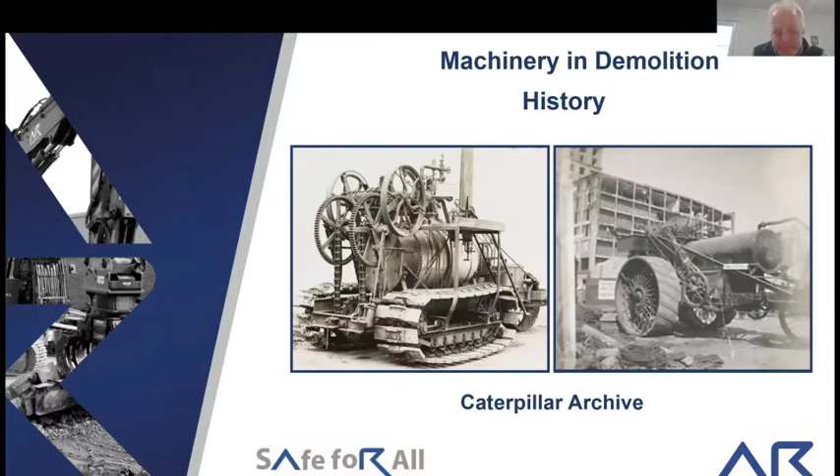But I have a passion for steam, which, as I explained earlier, I'm not sure whether it's a good thing being seen as the modern day Fred Dibnah or a bad thing, because Fred Dibnah's practices in demolition were very entertaining, but I couldn't say that they were the best practices.

But steam engines were used a lot in demolition, and really interestingly, I actually used a steam engine in a project of ours in March 2020, last year, a very high profile project in a quarry for Aggregate Industries. We got some sections of old conveyor framework to tow up a ramp, and it seemed to be the best kit for the job, and it worked incredibly well. It was interesting when I mentioned to the client I wanted to bring a 100-year-old steam engine with a winch on it into a quarry, but it worked well, and they were delighted. And I do have a bit of, if it's not broke, don't fix it, and if a bit of kit will do the job, then use it.

I have to pick up on the wrecking ball, because the two most popular questions ever asked to me are, do I blow things up and do I use a wrecking ball? I've done 3 explosives jobs in my entire career, and I've never seen a wrecking ball work in my entire life, which I would love to see, and they're still used widely in America particularly. So the wrecking ball is well and truly ingrained in our history books, but you won't see one used in the UK now.

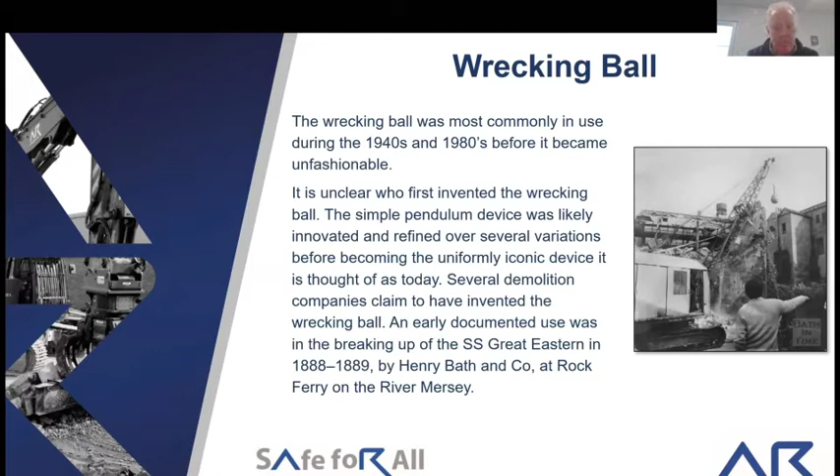So about our techniques and how we consider our techniques and what we do, there's various types of demolition. So there's the word demolition, where we demolish a structure. We get more involved in deconstruction, so reverse construction, take it apart. Quite often we're asked to take a structure down but with as little impact or disruption to the surrounding community as possible. So almost like a magic trick, we want you to get rid of that structure, but we don't want any interference to anybody while you do it.

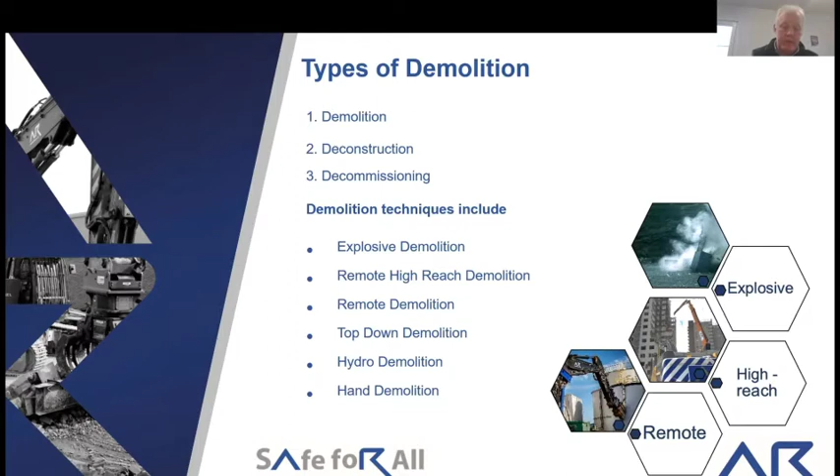So this might be a multi-story tower block where we'll wrap it in scaffold, and we will literally just take off one floor at a time, gradually reducing the structure from within the scaffold and bringing the scaffold down with the structure. And from the outside, you just wouldn't see it happening. All you'd see is a gradually reducing scaffold. Hydro demolition, where we use high pressure water to sometimes remove concrete, and still you'd be surprised at how much hand demolition work happens, where we really do carefully take things apart.

So the key considerations we have is we try to liaise with as many stakeholders right from the beginning. So anybody that's involved in the project, whether it's the client, the surrounding public, anybody that might be involved is critical to engaging with those as early as possible. We have somebody to coordinate all of that planning, and then we have to look at things as simple as a footpath closure or a road closure. We can need 3 or 4 months sometimes to apply for a footpath or a road before we actually get that closure.

And then a big one is services. So if you were demolishing a structure and there's a large gas main, a large electric main, we have to think about, do we need to divert it? Do we need to protect it? Or as simple as before we demolish a structure, we have to disconnect the services, which can be challenging itself.

And then asbestos is one of the big things that we have to survey for. So by law, before you start any work on any structure, whether it's refurbishment or demolition, you have to have an asbestos survey done, even if it was built after we stopped using asbestos, because there's still a likelihood that something may have got in there. Perhaps something was stored in a builder's yard, and the builder thought, oh, we'll just put that panel in there. So we still have to have what we call an R&D survey done, so a refurbishment and demolition survey.

Asbestos is a funny one, because a lot of people run scared of asbestos, but if it's controlled correctly, it's not expensive to deal with, and it's not expensive to dispose of. And particularly in the agricultural world, we do lots of asbestos cement sheds, which is the lowest risk asbestos of the lot, really, and the training is fairly simple to deal with that. And then the disposal is fairly straightforward as well.

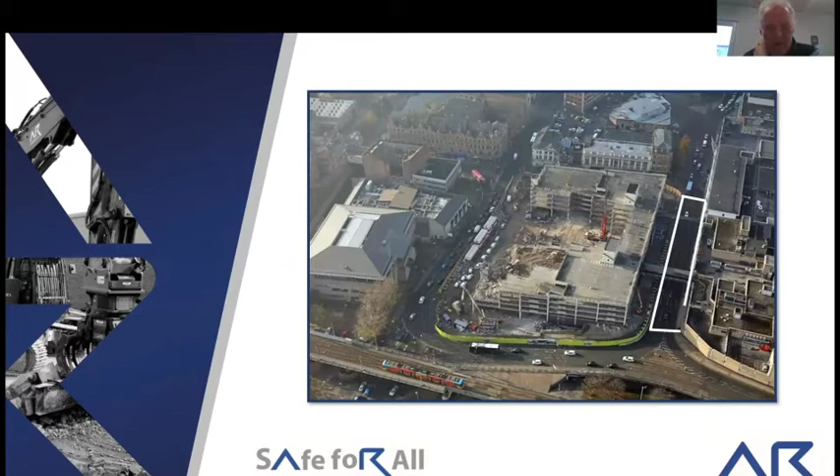So the project I'm going to talk to you about is a very challenging project that we did in Nottingham. It was a multi-storey car park with underneath it a bus station, and there were many challenges thrown at us with this project. So this is an aerial shot that was taken during the demolition, and to just point out most of the constraints. So we've got a lot of cafes and restaurants around us.

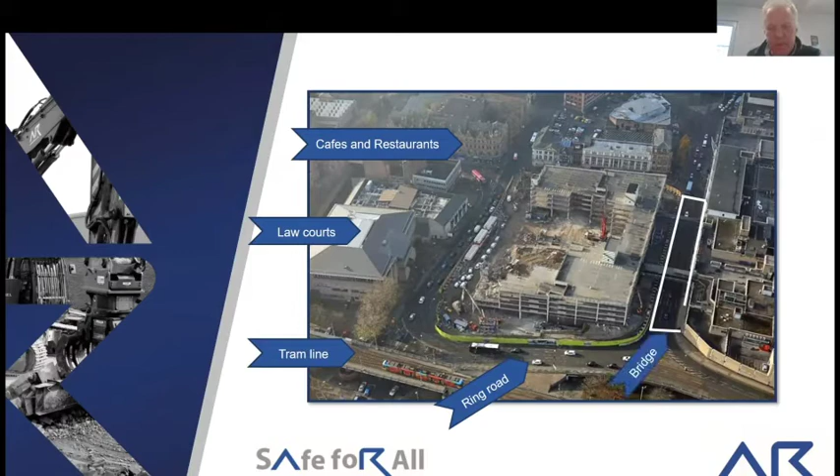Exactly opposite was the Crown Court. To the west elevation was the Nottingham tram line. Between the tram line and us was the Nottingham Inner Ring Road. The area outlined in white is a 5-lane piece of road between the car park and the Broadmarsh Shopping Centre. And that piece of road was actually a bridge. So underneath it was shops, which were all kept open during the project.

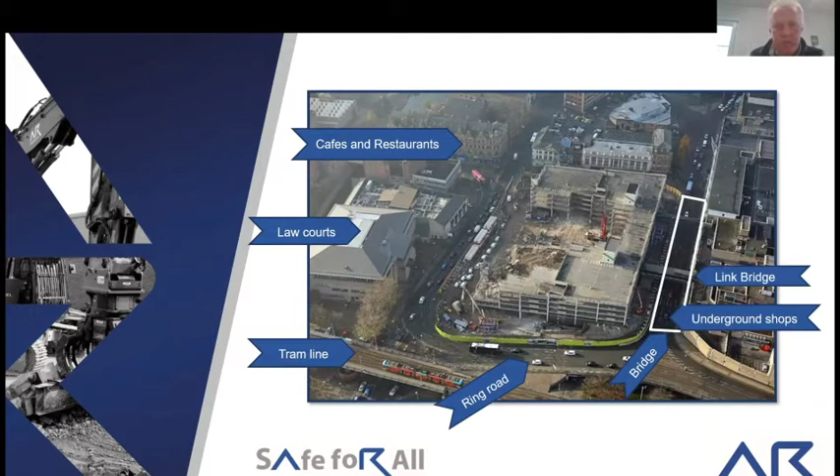In the bottom right-hand corner of the car park itself, there were 4 shops and a Subway actually within the structure, and our brief was we got to keep every one of those shops and that Subway open for the entire duration of the demolition. So we had to bring 4 or 5 stories down to the top of these shops and onto 2 elevations of them. There was an overhead pedestrian bridge from the car park to the shopping centre. The shopping centre, as I've mentioned.

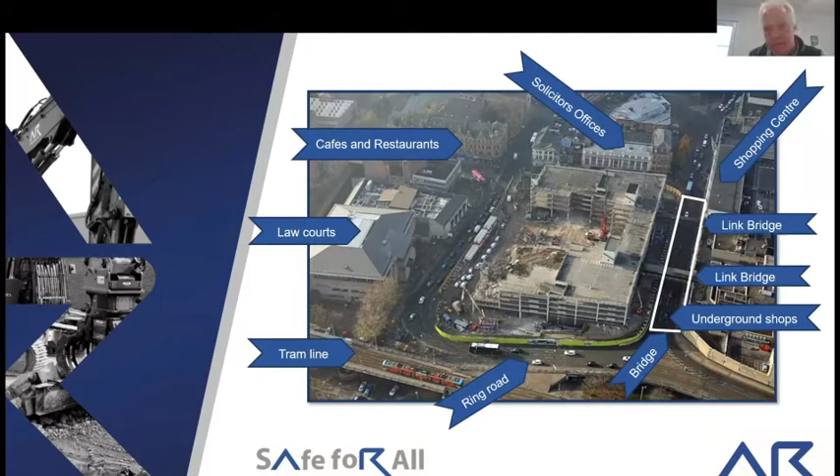On the east elevation, we've got solicitors' offices, another link bridge. Underneath the structure, there was a district heating main. And I should also point out as well, there was a BT fibre optic running through the structure. So we had to consider every one of these things before we even started work and plan how we were going to do the project.

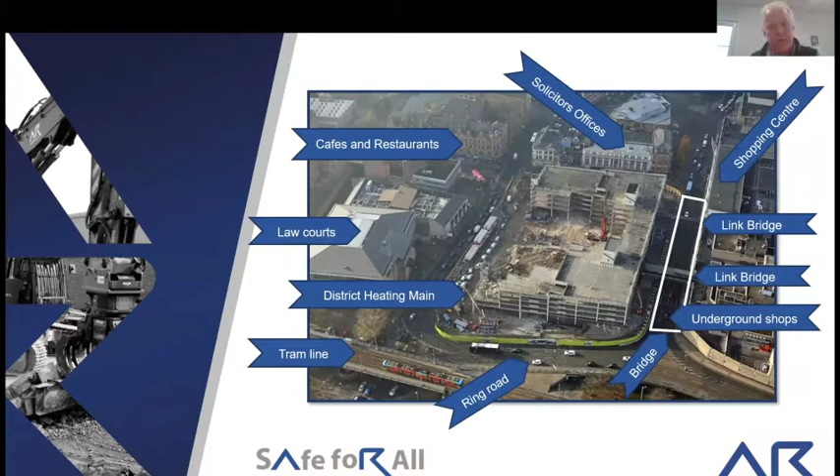The people involved in the project, we got the client, which was Nottingham City Council. Then there were the operators of the shopping centre. They were very interested in what we were doing because we were working directly above them in some places, and the people that they'd leased shops to. And then there were several consultants involved in the project. And also the HSE took a very keen interest when they learned that we were knocking 4 stories of car park down directly above some shops with people doing their shopping in.

So early doors, we built what we call a 3D phase animation. It's actually a 4D. So by 4D, we build a 3D model of the project, and then we animate it so we can show people how we're going to do the project before we even start. It's almost like a cartoon, but it's a fabulous way of showing how you're going to do something.

Over several weekends, we put an exhibition in the shopping centre talking about how we were going to do it. We also put in there a simulator of one of our demolition excavators that we actually use for training our operators, but also we were letting the kids have a go on it, adults have a go on it. So we were attracting attention with the simulator, but then people were watching the animation and talking to us about the project, which was very successful.

A local college was doing an engineering-based course called the Budding Brunels. We had them on site for a visit and taught them all through the demolition project. And all the way through the project, we had work experience students as well.

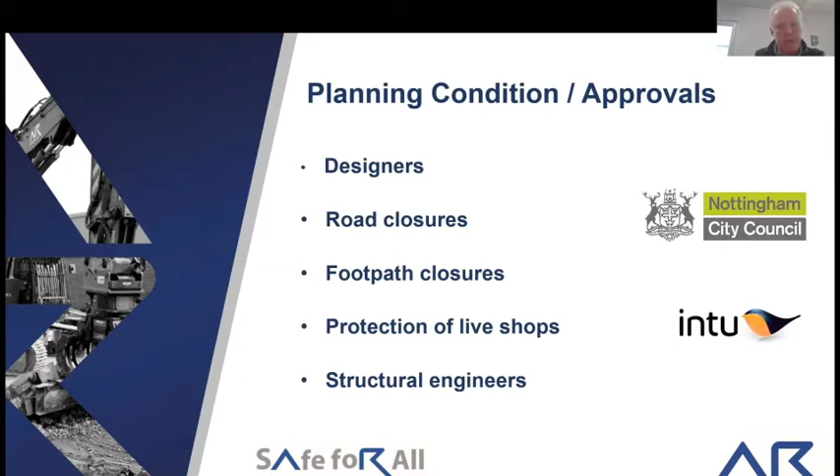And the competencies, so in the world of demolition, we have various different stages of competence, right from a labourer to demolition operative to what we call a top man, which is incredibly politically incorrect now, but it is still the words that we use. And that's somebody that's a highly trained demolition operative that's working out on the site but not operating plant, and, you know, working with the hands a lot, steering what the plant's perhaps doing. And then we have plant qualifications, supervisor, manager, and then memberships of the Institute of Demolition Engineers, which is something that I mentioned earlier.

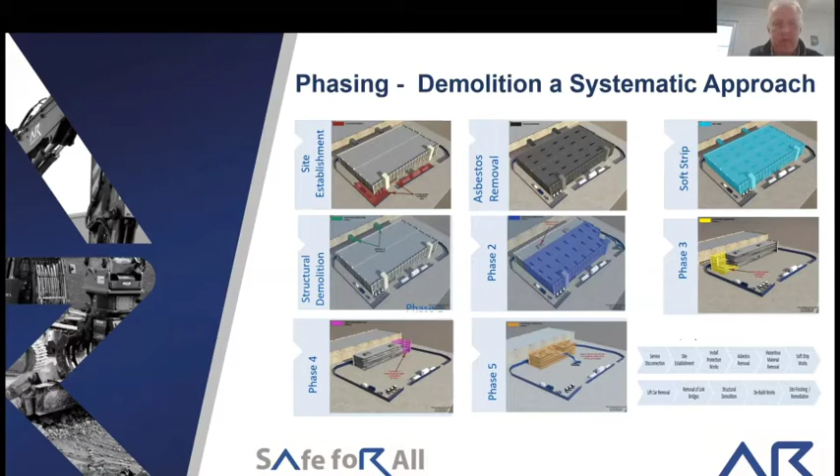So these are just some shots of the 3D model that we built, where we talk about site establishment, so we could demonstrate to our client what we were going to put up in the way of welfare, parking, and then we superimpose onto this the phasing of the asbestos removal, what we call the soft strip, which there wasn't a lot of in the car park, but where we take out doors, door frames, anything that's not part of the main demolition. Then the structural demolition phasing, we talk through all of that. And interestingly, as you'll see soon, the phasing of the demolition had a very large change. And that was through this.

And the other thing we have to do, we have what we call the safety factor. If we think that bridge weighs 60 tons, 65 tons, by law, we have to allow to lift double that. So we had to allow to lift 130 tons, because we get to a point of no return. And when we get to the point of no return, if we've slung the bridge onto the crane and then we cut the bridge, we have to be absolutely confident that we've got our calculations right and the crane's got capacity in it, for obvious reasons.

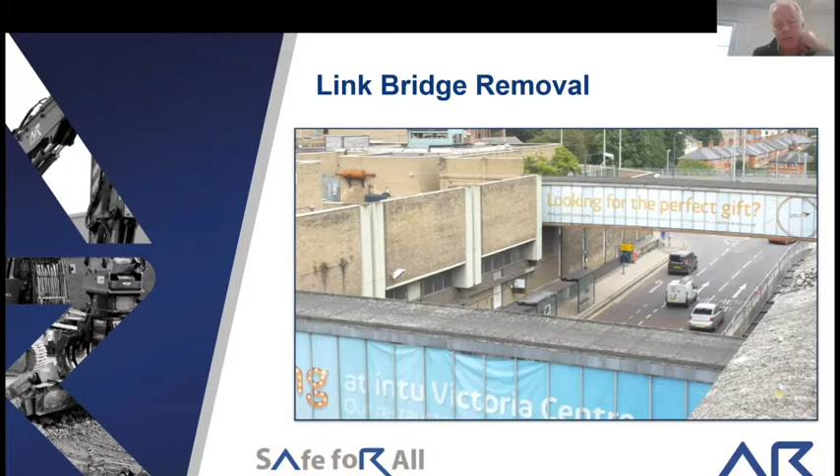But before we could even get the crane to site, we had to prove the base of where the crane was going to sit. So we have to do lots of tests on the ground. Once we've got the information from the ground we then have to design a platform for the crane to sit on. So by the time we'd finished, we put down a meter deep of crushed hardcore for the crane to sit on. And we have to put that in layers, compact it, test it. And we have to guarantee that base is suitable for the crane.

And I had to insure the crane for just under £8 million. And so not only are we having to satisfy our insurers that we're doing everything right to site the crane before we even connect the crane to the bridge. And then

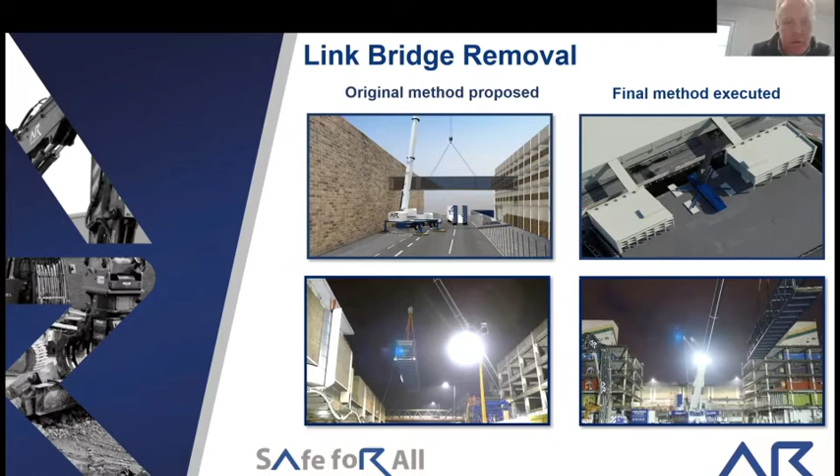You can make out there, we're lifting one of the sections. We actually lifted it over the top of the car park, lowered it into the site, dropped it down and cut it up. And we did one on a Friday night and one on a Saturday night through the middle of the night. So there was probably 8 weeks of planning in for 2 nights of work. For anyone that's interested, I'm sure they are, the crane cost £25,000 a day in hire charges. So I was keen for it to go like clockwork, as you can well imagine.

And because it was all concrete and steel, we came up with a process where we'd cut the floor into sections, lift the floor out in sections, and then lift all the beams out. So we had to work out exactly where the floors join the steels, and we would use diamond cutting equipment to cut those floors up.

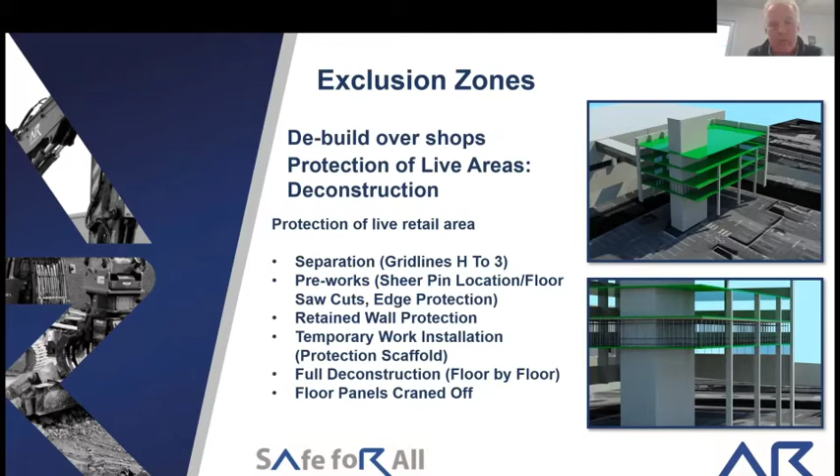The way that worked, we'd do one section of floor at a time, and we worked with a system where we would have 2 gangs operating, 1 gang preparing, 1 gang lifting. So we got good utilization of a crane, and we just took that down floor by floor, 1 floor at a time, until we got to the top of the shops. And I'll come on to that a little bit more later.

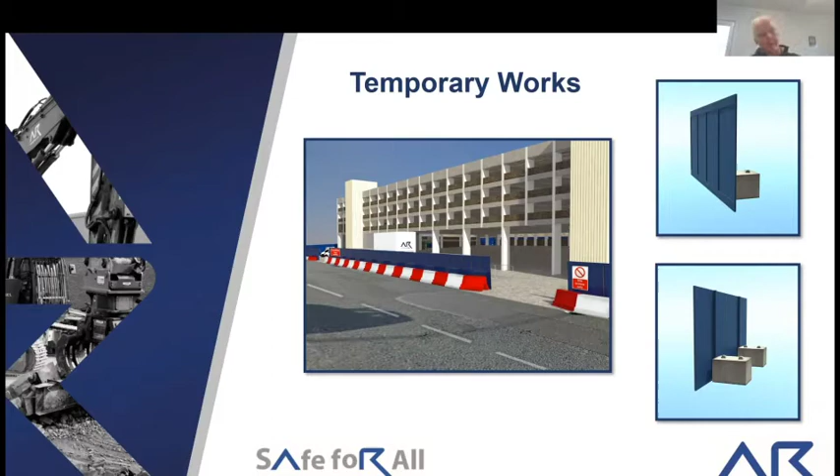And again, I talked about temporary works. So even a hoarding around the outside of the site, by law, you can't just put a timber fence up anymore. We have to look into the local weather cycles that date back 2 or 3 decades. And then we have to design a fence that we think will be wind resistant for the duration of the project. And then once we've designed that fence and passed it off, we put that fence up, and we have to get an engineer to sign it off. So something as simple as putting a fence up now is not simple. And this is what we call temporary works.

And a bit more temporary works. When we were demolishing the car park itself, we came up with this innovation that we call Big Blue. And if you look at this picture on the left, you can just see the traffic lanes which have got traffic in. And we were about 8 meters from that lane with the face of the car park. And that was the only exclusion zone we were allowed. So we needed something to protect those lanes.

And a lot of contractors use scaffold, but I don't believe that scaffolds suffice to protect from flying debris or even a partial collapse. It wouldn't be great for dust. So I came up with this device, which was a 45 feet tall structure with 2-inch timber face on it, and it was designed so it could take a partial collapse, and it could also obviously protect from flying debris.

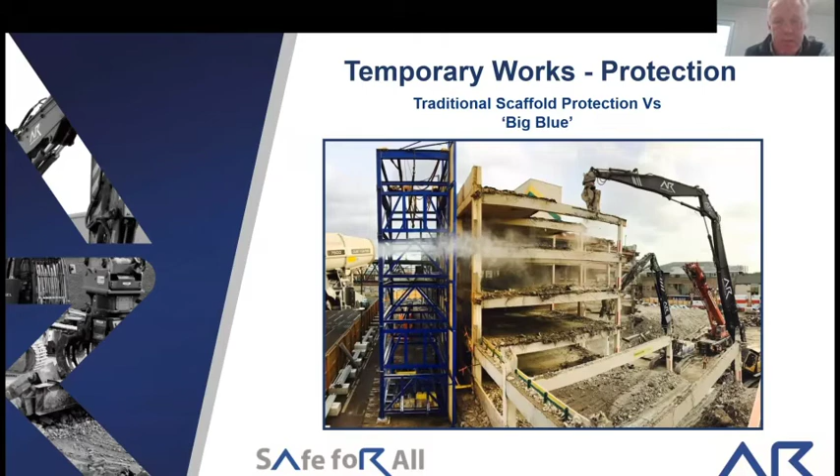Now, how that frame traditionally works is we put a large amount of ballast weight in the bottom, but we couldn't on this project because we're still sat on top of that bridge, and there was fear of the framework going through the bridge. So on the non-leading edge of the demolition, we'd actually tie it back to the structure, so that the structure was actually acting as a support for the frame. And it proved to be a very effective way of controlling debris and in the event of a partial collapse.

A little bit more to talk on temporary works. Something I didn't mention was that the whole car park was clad in precast concrete panels. We had to get most of these off before we started the demolition. We came up with a method where we could get a lot of them with a crane, but most of them we had to do from the inside. In the top middle picture, we used a small skid steer. We mounted a hook mounted jib on it, which we had to have tested, and we drilled every single concrete panel and put a lifting eye in every panel.

But in our world, you can't just drill it and put a lifting eye and connect a chain to it and lift the panel up and drag it into the car park. We'd have to put a lifting eye in, and in the bottom middle picture, we'd do a pull test on every lifting eye to make sure it was going to take the weight of the panel before we could connect it, lift it, and bring it into the car park.

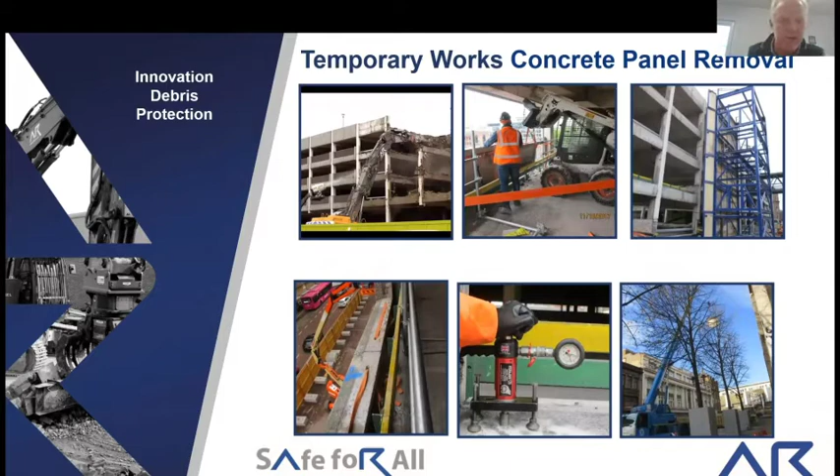There was just one elevation where we didn't take them off, where basically it didn't matter. If you come back, you can just see on the top left-hand picture there, the panels are still on the structure, and that was on an elevation where there were no services lower down, no bridge, nothing, so they could be brought down using traditional demolition techniques.

I mentioned to you about these floors that we took down floor by floor. Again, we have to think about safety of the workforce, and we had to come up with a platform that we could put under the working face of where we were working. So that's where we came up with Baby Blue, another innovation of ours, where we built these platforms which have got a handrail on. So whenever there was what we call an open edge where somebody could walk off, there was always a handrail. And then the other 50% of the frame would be sat underneath the panel that we're about to lift. So we'd saw cut the panel, sling the panel to a crane, and then we'd lift the panel out.

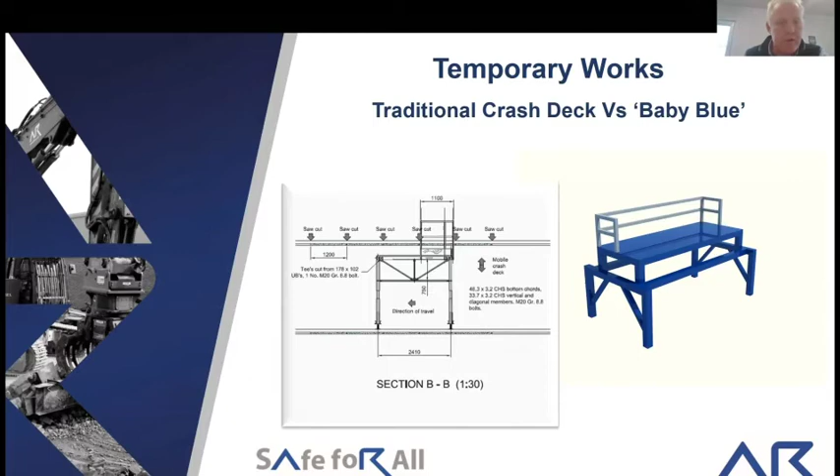And as we lift the panel out, this device allowed there to be a false floor underneath. When we lifted the panel out 1 meter at a time, we'd move the frame back and go again. And as I mentioned, we've got 2 of these working. And what it allowed us to do, coupled with handrails that we put on top of the structure, we never ever once had an open edge. So there was never anywhere where anyone could walk off. And we'd always got every single panel supported before we cut it. The top section of this frame was on hydraulic rams. So every time we moved it, we'd just lift the frame up a few inches, so it was almost supporting the panel that we're about to lift out.

I mentioned to you about welfare. So the top 2 pictures are pictures of our actual welfare setups. And, you know, we take this seriously. It's where our guys have their breaks, have their lunch. We quite often have a cleaner on site. If you look closely at the top right picture, we quite often put planters with flowers and things in to try and make it a little bit more homely and nice. And you know, these things are important. And then the bottom illustrations are just an illustration of how we intend to set our welfare up to show the client.

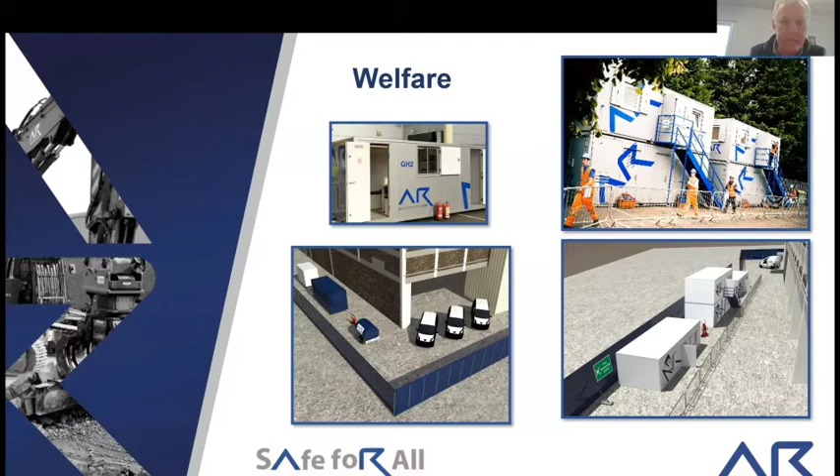Environmental controls during the project. So I've mentioned that we do various types of monitoring: dust, vibration, noise. We test for asbestos in the air while we're doing asbestos removal. And then we produce graphs and charts at the end to show all the statistics of what we've had.

We manage all of the waste. We sort everything out, and we don't just sort it out to metal, concrete, wood. We then sort the metal out into grades. We do different things with the concrete. We separate the waste. When we do a project in general, we'll separate carpets, curtains, and everything that we can stream easier as individual products. We can generally recycle a lot better.

And we're working towards cradle to cradle strategies, because I'm very passionate about this. We knock an older structure down and it's far easier to recycle than a modern structure, and that doesn't really make sense to me. And quite often an older structure's lasted a lot longer than a modern structure as well, and we need to be looking hard with clients and designers of new structures at what we're going to be doing with a structure at the end of its life. It's a really big deal, this is.

And I mentioned our dust machine, and this is actually the base of it. So you saw the head of it, but I wanted to pick up on this because you'll see on the front of what you traditionally know as a telehandler, that's a generator, which provides the electric power to run the head of the machine, and then you can see on the back there's water tanks, so it's independent.

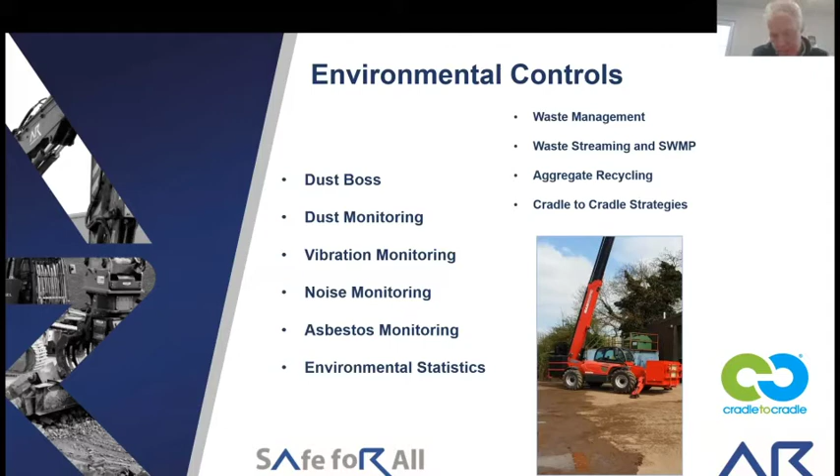I'm sorry, that should have actually turned to a video, but I appear to have failed with that. I'm sorry.

So on completion, we leave the site neat and tidy. If you look closely at the picture, you can see a pile of crushed concrete on the right. We crushed that down to 40 mil down and certified it as what we know as type 1 for reuse in the next building project. And actually there's a new car park on there now, which is nearing completion.

You can't really make it out, but the piece of structure directly in front of you is now the roof of the 4 shops that remained, with all the other structures taken off the top. Ironically, after we'd completed it, and the main contractors priced to build the new car park, every single main contractor said, we're not warranting the new car park on top of the old bit of structure.

And we then got instructed to return and demolish the bit that we'd saved, which was interesting. I mean, it was a good challenge to demolish down onto the top of 4 live shops, but then a little bit disappointing to knock them down at the end of it.

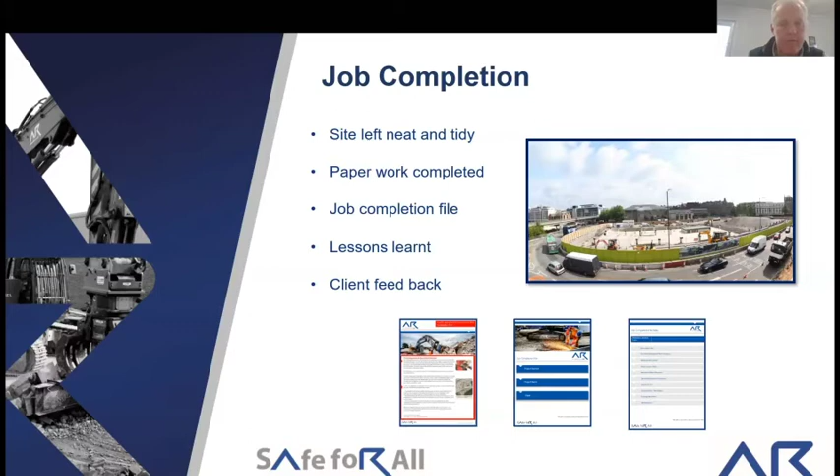We then produce a job completion file which has documentation which shows where we've got rid of every little bit of waste. It's important that we have a full document trail to say what's happened with all the waste. We sit with clients at the end of the project to do a lessons learned for them, and really importantly, we look for client feedback on how we could have done things a little bit better.

I'm going to try, hopefully. Oh, no. Yeah, if we're taking any questions, I've got something where I can hopefully get the film I want to show you logged up.

So yeah, in summary, demolition is a really exciting industry to be part of. We're always changing what we do, we're learning and working around changing environments. And I hope that you enjoyed a quick look at my world, and perhaps have a little better understanding of what we do. And thank you for your time.